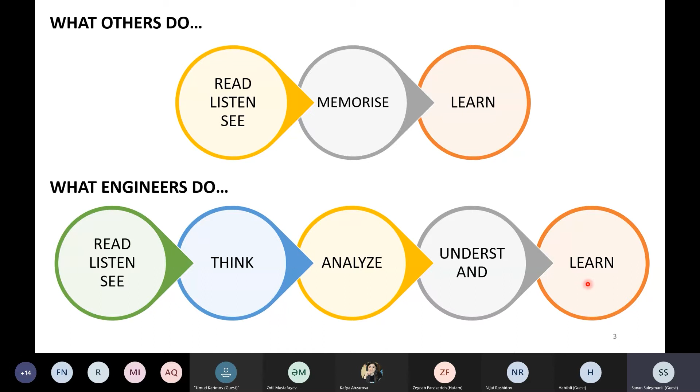I will show you also a pyramid that shows how we learn, and at the end you can see that 95% of what we teach to others - if you share your knowledge, you learn more and more.

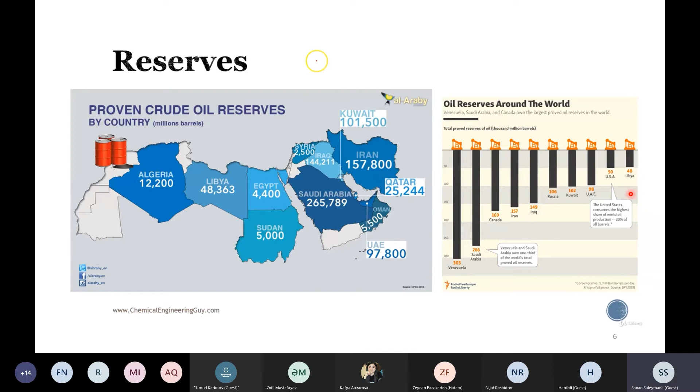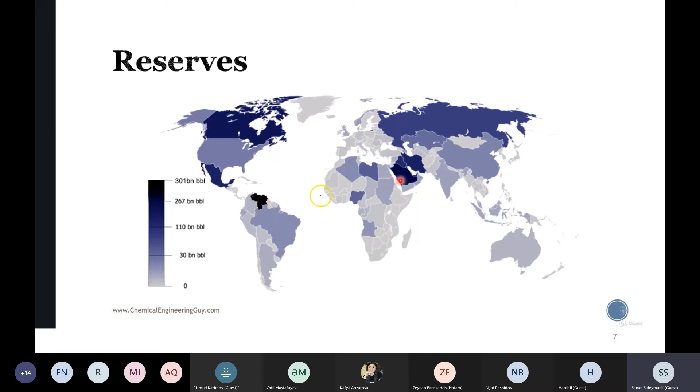Oil reserves - why do we have oil refineries? Because we have a lot of oil reserves. Here you can see that the most oil reserves can be found in Venezuela, Saudi Arabia, then Canada, etc. If we have so many oil reserves, then we also should have many oil refineries. This shows the map view of the oil reserves - again you can see the most oil reserves are in Venezuela, Saudi Arabia, Iran, Canada, etc.

This is the statistics from the BP Statistical Review of World Energy 2018. Comparing the years 1997, 2007, and 2017, we can see a sharp increase in proved reserves, from 1,162,000 million barrels in 1997 to nearly 1,700,000 million barrels in 2017. If you are interested, you can check the market analysis and supply chain reports - there are a lot of reports on the internet. However, I don't want to go deep into this part because we have a lot to discuss in terms of engineering.

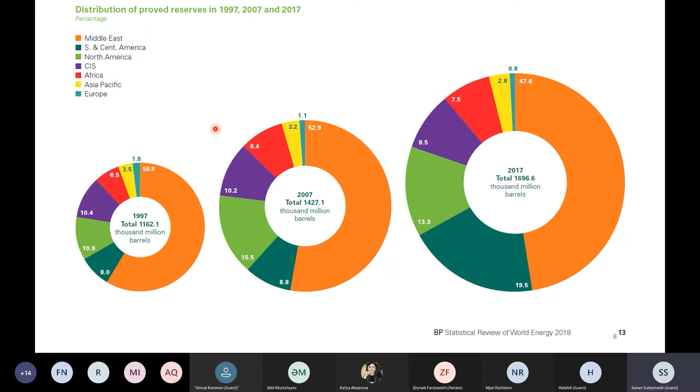Then what's crude oil? Crude oil is a multi-component mixture consisting of more than 108 compounds. In the next slide we will see that crude oil is mainly composed of hydrocarbons and also other impurities like water. That's why we have to refine oil - because we cannot use crude oil effectively without refining.

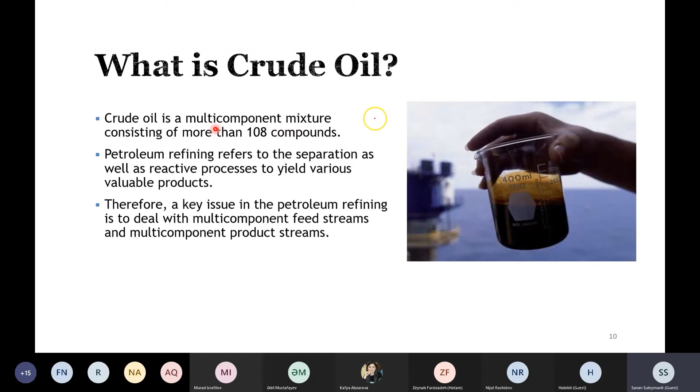You can ask, what is refining? Refining is just changing the shape, or bringing the feedstock to useful products. It's not only oil that is refined - milk is also refined, and we produce different products from it. Nuts are also refined. So different feedstocks can be refined, but today we will talk about crude oil refining. Petroleum refining refers to the separation as well as the reactive processes used to yield various valuable products.

Before starting the refining, we can classify our oil. Here you can see we have light sweet to heavy sour oil. What is light? Light means light oil, low density oil, with API from 35 to 60. You can find the specific gravity using this formula, which means that once API increases, specific gravity decreases. So higher API means lower density of crude oil - that's why it is considered light oil.

For your information, the API of the crude oil we are refining right now at Heydar Aliyev Oil Refinery is around 30. 30 API means we have medium density, and that corresponds to around 0.875 specific gravity. What about sweet and sour?

Sweet and sour represent the sulfur content of crude oil. From 0 to 0.5 weight% sulfur, it is sweet. If you have more than 0.5 weight% sulfur in the crude oil, that is sour. Okay, what does this tell us? Why do we need to classify our oil as light and sweet?

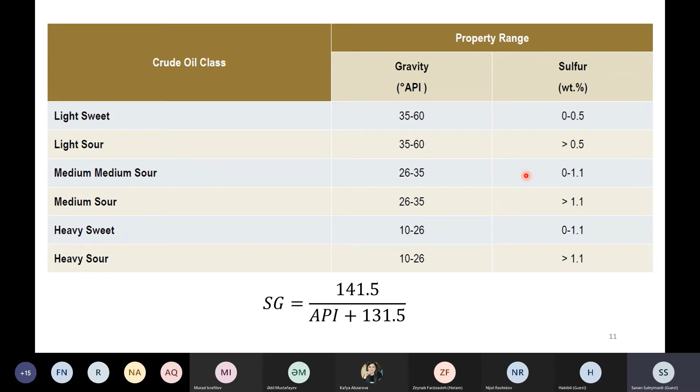Before answering the question, we can check the composition of crude oil. From 1 barrel, which is around 159 liters of crude oil, we can produce around 46% gasoline, 9% jet fuel - also called kerosene - and 26% diesel and other fuel. Of course, these numbers are not exact. They can differ for different types of crude oil, and depending on what we want to produce more of.

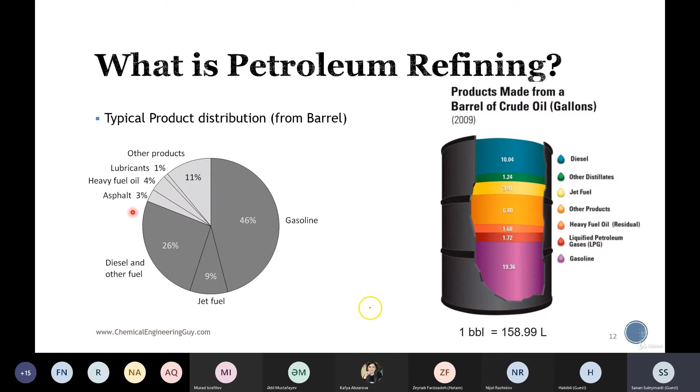If you want to produce less gasoline, then we design our process so that this number will be lower, but diesel will be higher, for instance. In fact, you can see that light fuels, or the useful fuels, make up around 80% of crude oil - that is where refiners earn the most money. That's why refiners try to produce as much gasoline, jet fuel, and diesel as possible in order to make money. Other products - lubricants, heavy fuel oil, asphalt, bitumen - are considered heavy products, which in fact have low contribution to profit.

There are around 108 components in the crude oil, and the carbon number can start from C1 to C70 plus. That's why it's a mixture of really light components till heavy components. We have to separate it.

We separate it, but our products are not pure substances either. Our products are also mixtures, but in a certain range. So we have C1 and C2, which we call dry gas. We have C3 and C4, which we call LPG. So from C1 to C4, we have the gases.

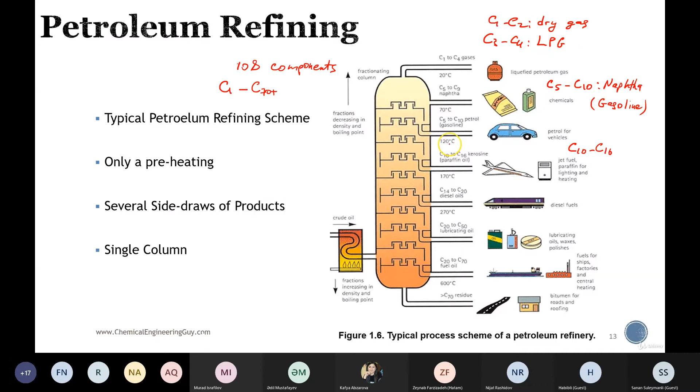Okay, I continue again with the same BFD. Now it should be more similar to you. Now you are already familiarized with some of the terms. For instance, what we said is that we have LPGs, butanes. Butane is C4, LPGs is C3 and C4.

We have the refinery fuel, C1 and C2, jet fuel, kerosene, diesel oil, fuel oil, which also can be considered as diesel. And then asphalt and coke. We have the different streams of gasoline from different units, and then we blend them in the pool.

So each block we call a unit. Each unit does not mean one piece of equipment. Depending on the size and the complexity of the unit, there can be from 50 to 500 pieces of equipment. So when we say the unit, it is a small plant in the refinery.

Now I would like to ask you something. We said that if you want to learn, we have to think, analyze, and understand. For this, we have to ask questions. Now I want you to write down a why question or how question. Just look at the scheme, the block flow diagram, and write whatever you want to ask, starting with why or how, in the chat please.

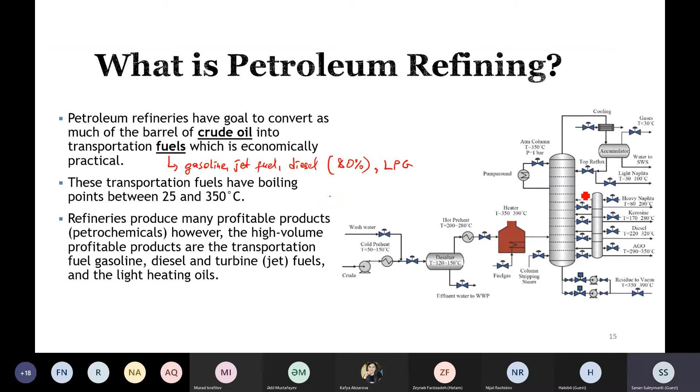This is the crude distillation unit, which we will talk about later. And if you remember, I asked the question why we should classify the crude types. We have sweet and sour, light and heavy. This is what we learned about the crude types.

If you have a sweet and light crude, then we need a less complex refinery to refine this crude. However, if you have heavier and sour crude, it means that we need more complex equipment. Why? Because if it is sour, you have to clean that. To clean more sulfur, we need higher design capacities or more complex equipment, higher pressure, higher temperature, etc.

If we have the lighter crude, it means that we have more transportation fuels in the crude oil. But if you have heavier, then it means we have less. What we want to do is crack the heavier part of this crude into lighter hydrocarbons, which are considered transportation fuels. And cracking units are more complex.

And this, what I explained, is written here.

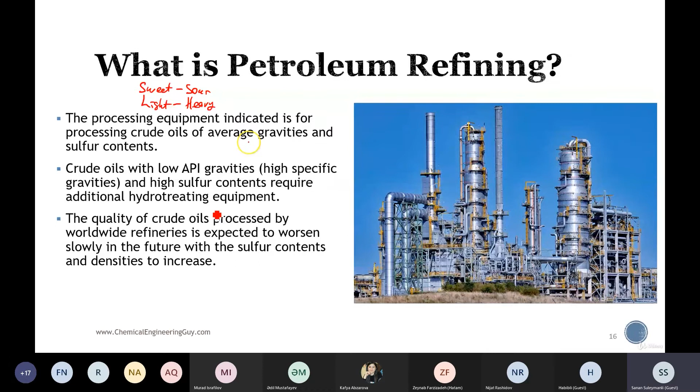However, in the future, what we can expect is that we will run out of light crude as time passes, and we will have to use heavier crude in 20, 30, or 40 years. In this case, this will make the refiners process the entire barrel of crude rather than just the material boiling below a certain point. So you will use higher temperatures, higher pressures, and it will cost more to refine the heavy crude.

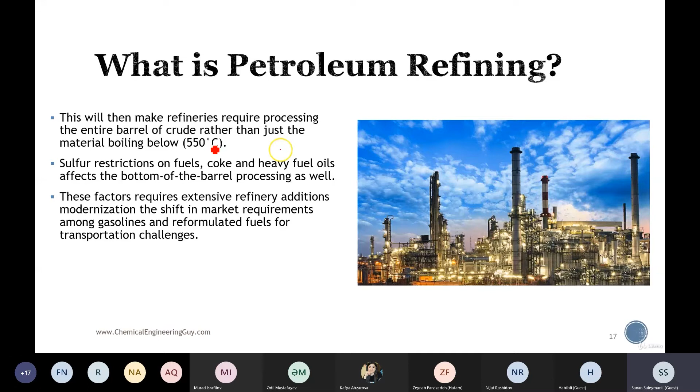These are examples of the petroleum products, which we saw in the previous one. We have the gases, naphtha, kerosene, light gas oil, heavy gas oil, diesel, and residue.

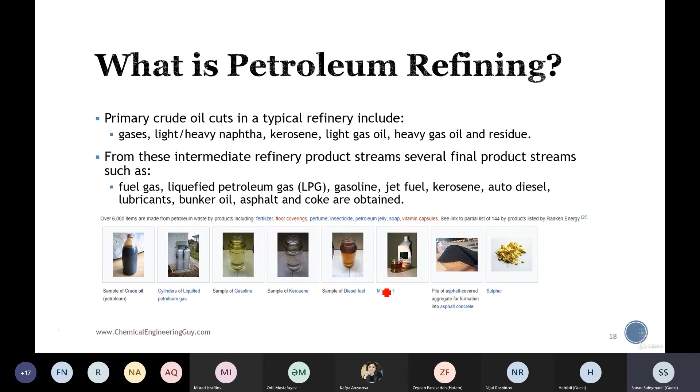You can find photos of the different products. Gasoline is transparent. Kerosene is also transparent. The diesel fuel has a yellowish color, and as it becomes heavier, the color also becomes darker.

These are different types of products obtained from crude, because the light fuels such as C3, C4, and light naphtha can be sent to a petrochemical complex. Here in Azerbaijan, we send light naphtha to Azerkimya. In Azerkimya, they produce ethylene, and then they send ethylene to Socar Polymer. Socar Polymer produces polypropylene, and from polypropylene we can have, let's say, bottles or other products.

From chemicals, which are also produced from crude oil, we can have nylon, styrene, polyester. We have liquid fuels, lubes, residuals. Residuals can be used for bunker C, asphalt, roofing material. So as you can see, there is no loss in crude. We use the lightest component from C1 to C2 as fuel gas, to the heaviest component as asphalt or roofing material.

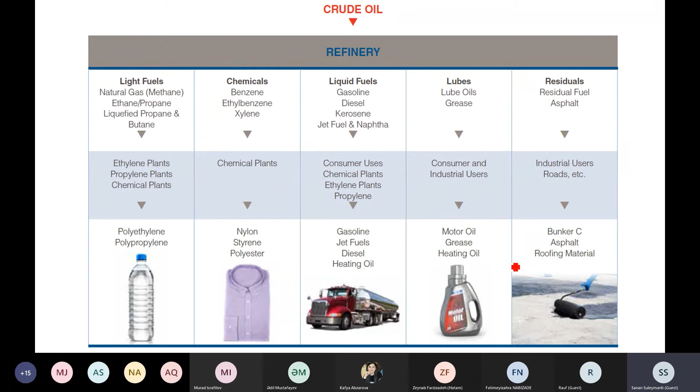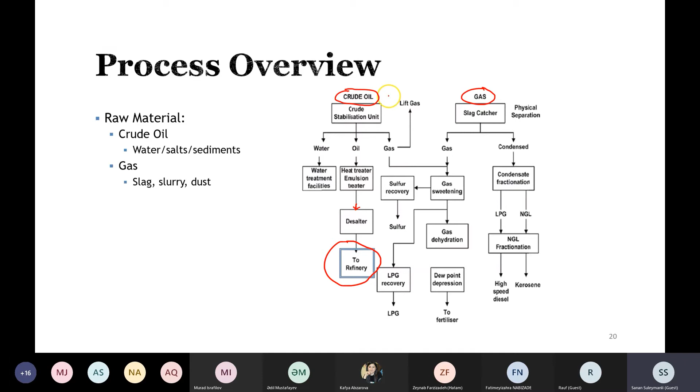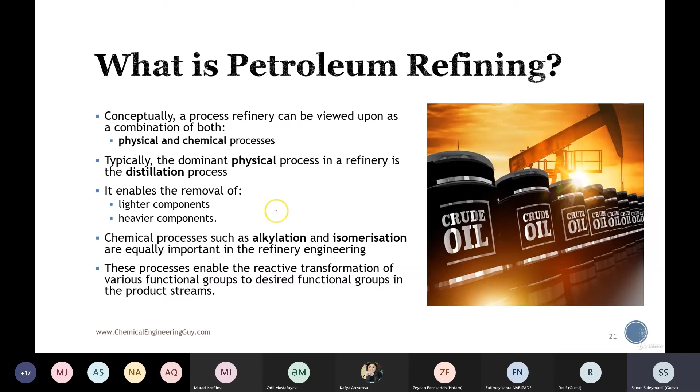And what is petroleum refining? In the refinery, there are both physical processes and chemical processes. The physical processes can be distillation, atmospheric distillation, vacuum distillation as a process unit. But of course, we have different types of separation or adsorption in each unit as a single unit operation. We have alkylation, isomerization, cracking, reforming. These can be examples of chemical processes.

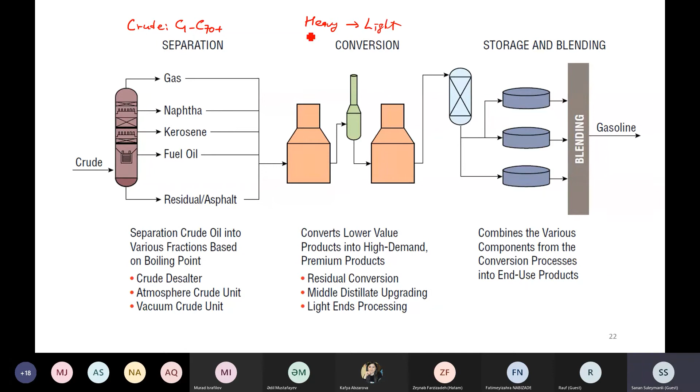We can separate the refinery processes into three parts. The first part is separation. Why separation? Because crude is a mixture of C1 to C70 plus, and we have to separate it first. Once we separate, we want to convert heavy products to light products. Why do we convert heavy product to light product? Because light products are transportation fuels, which helps to make higher profit.

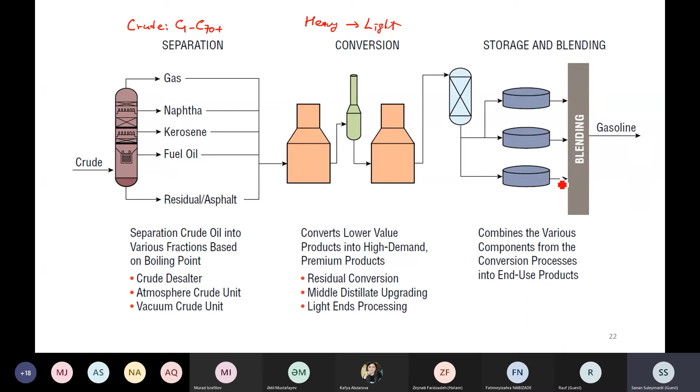And then after all, we have storage and blending. We blend the different streams, as I showed in the block flow diagram for gasoline, and also we have some additives to diesel, jet fuel, etc. Is that all? No. Why? Because we also have treating. What is treating? You can think of treating as cleaning - cleaning from sulfur content, cleaning from nitrogen content, also some oxygen, etc. Why? Because we have some standards, we have some product specs for the transportation fuels and also other products.

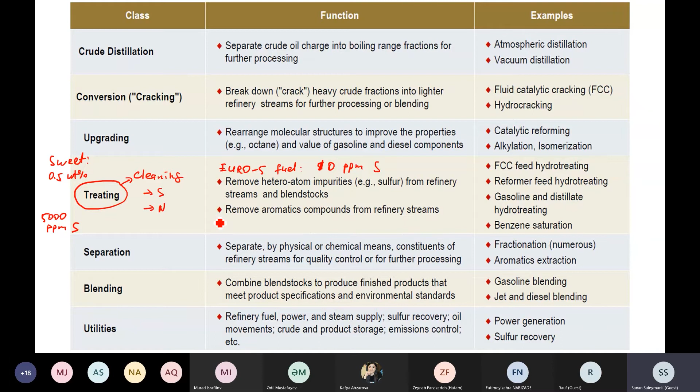For instance, if you want to produce Euro 5 fuel, you have the 10 ppm sulfur limitation. So what was the sulfur content of crude oil? We said for sweet crude, it is 0.5 weight percent, which means 5,000 ppm S content in the crude oil. But our final product, whether diesel or gasoline, should have the 10 ppm sulfur content. That's why we need the treating processes. These treating processes will remove the heteroatom impurities from refinery streams and blend stocks, and remove aromatic compounds from refinery streams. We will talk about treating more later.

It means we have from gases to really heavy residue. We need a special process, higher temperature and pressure. Also, the residues can poison the catalyst, because the hydrotreating process is a catalytic process. It can poison the catalyst in the short term, and it also has the 5,000 ppm sulfur. All this makes having a single hydrotreater before the distillation unit impractical. That's why what we do is first separate, then have different processes for each type of product, followed by a hydrotreater. But whatever you have there, you cannot sell your product without hydrotreating. You cannot sell your product with such a high sulfur content.

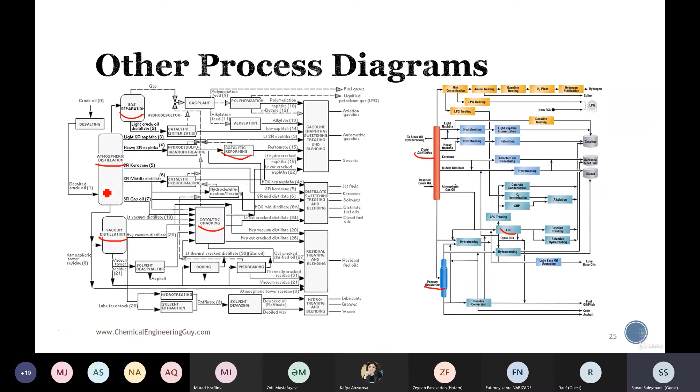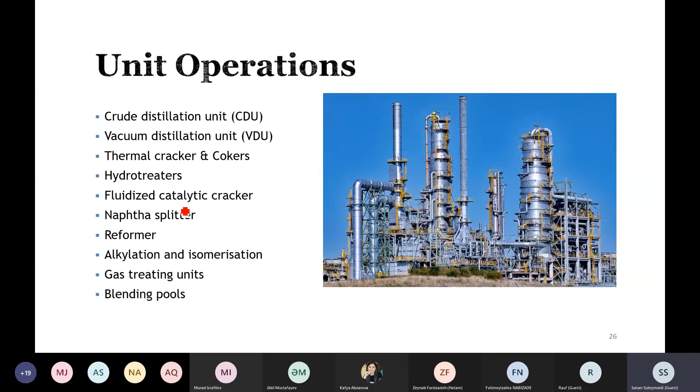Once again, what is a unit? Each single block is called a unit in the refinery, or unit operation. So here, what you see in these block flow diagrams are these types of unit operations: crude distillation unit, vacuum distillation unit, thermal crackers. Now delayed coker units are mostly used, hydrotreaters, catalytic cracking, naphtha splitter, etc. Now we are going to talk about these unit operations briefly.

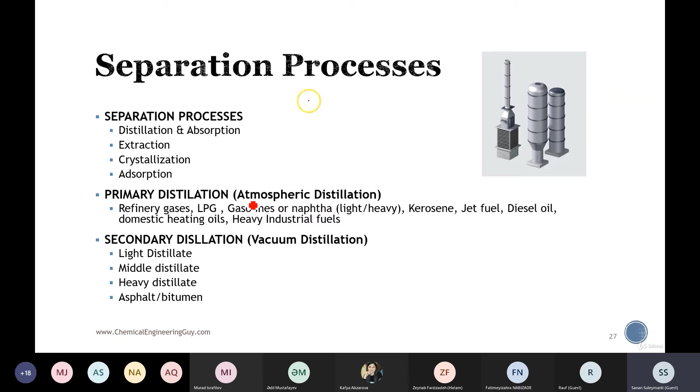Separation processes. So what I said before is that we can classify the processes in the refinery in a few steps. The first part is the separation processes, which can be distillation, absorption, extraction, crystallization, adsorption. You can find these separation processes in each unit; each unit has a separate distillation column, a reboiler, etc. This primary distillation uses atmospheric distillation, because that's the first unit of the refinery. We also have a secondary distillation, vacuum distillation. And conversion processes are catalytic reforming, isomerization, alkylation, hydrocracking, catalytic cracking, etc.

Sanan Bey, we have a question in the chat box. Rasul Amirov asks, what is a reformer? Thank you, Rasul, for your question. I will talk about the catalytic reforming process in future slides.

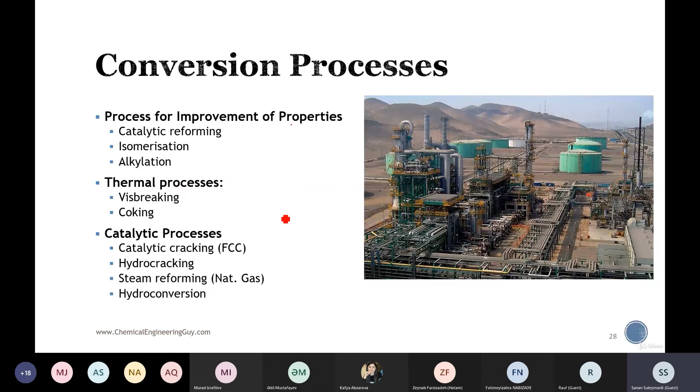And finishing processes: sweetening. Sweetening is used for gases, because if gas has H2S content, we have to remove the H2S content before we use the gas as a fuel. Why? Because if you burn H2S, it converts to SO2, which goes to the atmosphere, and when we have rain, we get acidic rain. That's why we have to sweeten the gases before we burn them.

And also hydrotreatment. We have hydrotreatment with hydrogen, for instance the RSSR plus H2 hydrogenation reaction, giving the product plus H2S. This H2S leaves the hydrotreatment unit process as a gas, in the dry gas, and then it is sweetened.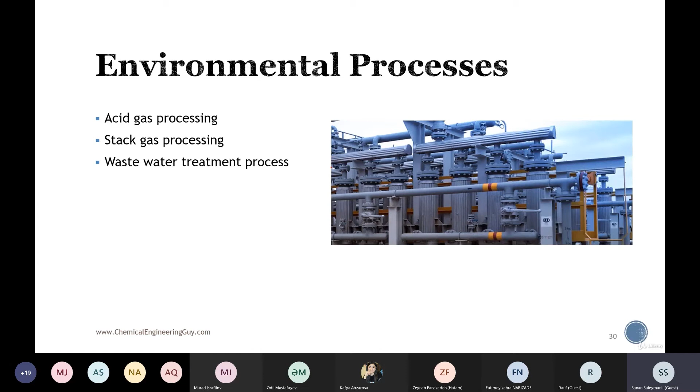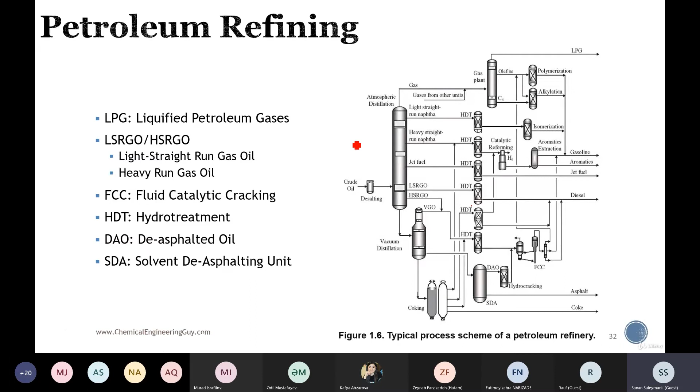Now, everything starts from atmospheric distillation. This is also a different view of the block flow diagram. Each unit has so many pieces of equipment, for instance the catalytic reforming unit. This is a really simplified PFD, but the real PFD has so many pieces of equipment, or the isomerization unit, alkylation unit. Each block is a different unit, each block has different processes.

Crude distillation unit. The crude coming to the refinery first goes into the desalters. In the desalters, we first add the wash water, we add the demulsifier, and then we create an emulsion, and then we separate all the water in the crude from the crude oil. The effluent water goes to the wastewater treatment plant, and the crude oil which was separated from the water is first preheated and sent to the heater, and at around 390 degrees it enters the atmospheric distillation column.

In the atmospheric distillation column we separate the products which we saw in the block flow diagram: gases, light naphtha, heavy naphtha, kerosene, diesel, atmospheric gas oil. This can also be considered as diesel, you can think of it like light diesel, heavy diesel. And then we have the atmospheric residue going to the vacuum distillation unit.

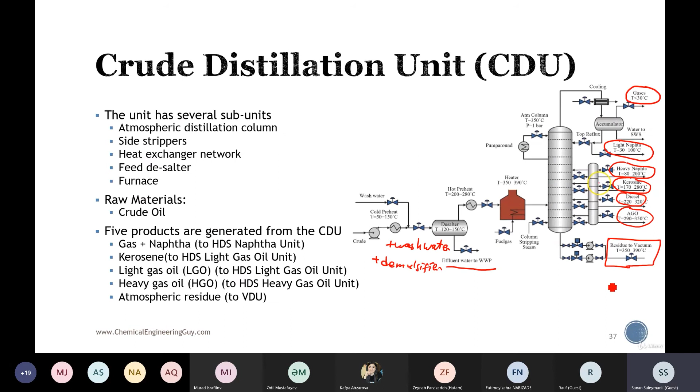Operating conditions: the temperature at the entrance of the furnace, where the crude enters, is around 200 to 280 degrees. And after the furnace, it is heated to 330 or 370 degrees. The pressure is around 1 bar G, as can be seen from its name, atmospheric distillation unit.

This is the flow diagram, a simplified process flow diagram of the crude distillation unit. It's the same atmospheric distillation or crude distillation unit. We have the same products again here, and this residue goes to the VDU, vacuum distillation unit.

What happens to these products? They are sent to the hydrotreater. And sour water - what does it mean, sour water? We have too high H2S content in the water. It can be sent to the sour water stripper, and in the sour water stripper, H2S and water are separated. Water is sent to the wastewater treatment plant, where we treat the water, and the water is sent to the Caspian Sea. And H2S is sent to the sulfur production unit, so we produce sulfur from H2S.

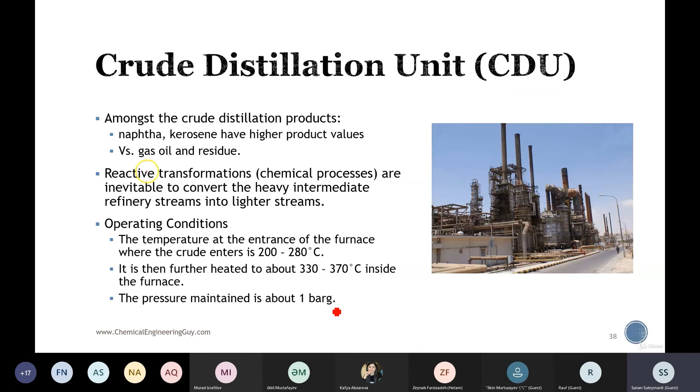Okay, I will answer. So you are probably familiar with absolute pressure and gauge pressure. P absolute is P gauge plus P atmospheric. So if you have G here, it means that it is 1 bar G, gauge pressure, which is equal to 2 atmospheric or 2 bar absolute pressure. But they are the same, so this has the same number.

This is the reason. And here I can see that Ilkin asked whether this water means that we have water in the feed. Yes, we have water in the feed. Yes, we have desalters, we try to separate the water as much as possible, but we still have water left in the feed. Also from the hydrogenation processes, if there is oxygen as an element, it can react with H2 and we produce more H2O.

There was another question: how many bars are in 1 bar G? 1 bar G is 1 bar, so 1 bar G is 1 bar plus 1 atm. This gives you 2 bar absolute. And 1 atm can be taken as 1 bar. If you want to be exact, 1 atm is slightly different, because 1 bar is 10 to the power 5 Pascal, and 1 atm is a slightly different value in Pascal.

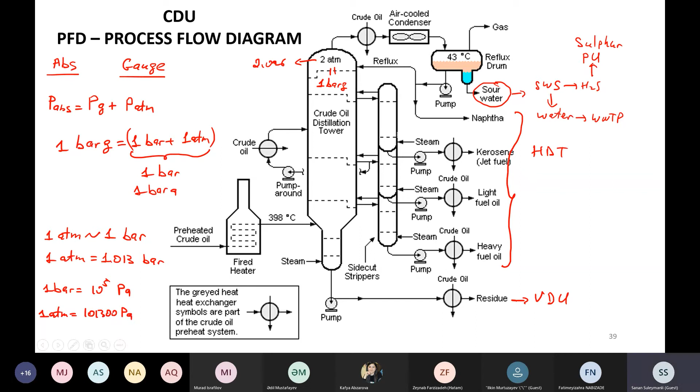What does it mean? 1 bar G is 760 millimeter Hg. So if you want to convert, let's say 40 mmHg, you will get around 0.05 bar G. Now I want to ask you, why do we have a vacuum distillation unit?

Why do we have the vacuum condition to separate the light products from the heavier ones? Hi, I can answer this question. Yes, please. Because if we separate in the previous unit, in this case we would need a higher temperature, approximately over 500.

But in the vacuum distillation, we have ejectors here, and we create the vacuum phase. In this case, we decrease the temperature and can separate at approximately 400 instead. But if we separate at higher temperature, our carbon-carbon bonds or others can be broken.

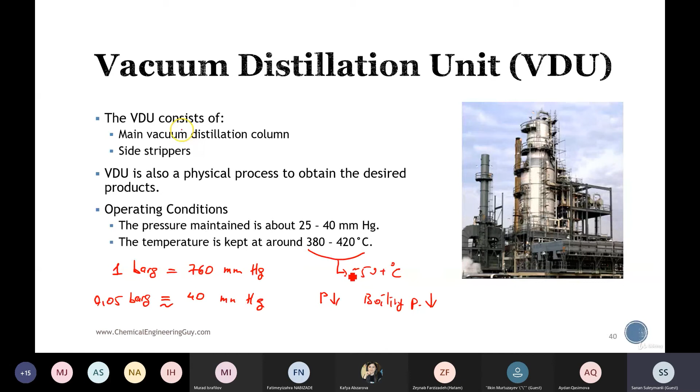So we have different products from the VDU, which are light vacuum gas oil (LVGO), heavy vacuum gas oil, and vacuum residue. Vacuum residue is the heaviest part of the crude oil, which is sent to the thermal cracking or coking unit, or it can be sent to the bitumen unit to produce bitumen.

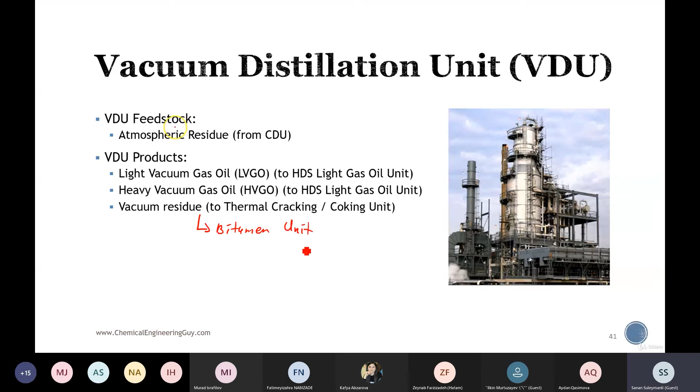We also sometimes have a lighter end, diesel, which is in low amount.

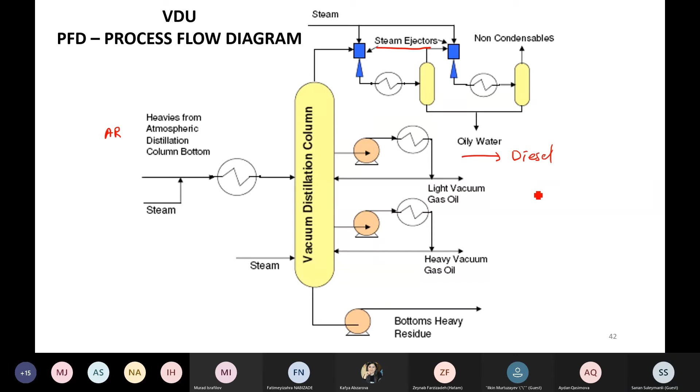Okay, we talked about the atmospheric distillation unit. We said the atmospheric residue goes to the vacuum distillation unit. We have the vacuum residue. Vacuum residue goes to delayed coking. Vacuum residue goes to the bitumen unit. Here we produce asphalt, and we will produce coke. I will talk about that later.

We have the light vacuum gas oil. We have the heavy vacuum gas oil, and then atmospheric gas oil, which is sent to the hydrotreater, and then to the FCC.

And the rest, as you can see, diesel oil is sent to the diesel hydrotreater, and then it is sent to product storage, and after adding some additives, it is sold. Also for jet fuel, we don't use a hydrotreater here, but instead use caustic and amine to clean the sulfur content of the jet fuel, which is why it's called the Merox treater. After the jet fuel is cleaned, it is also sent for sales.

We will talk about light naphtha and heavy naphtha now. First of all, gas treating units. As you can see, we have gases. When we say gas, we talk about C1 to C4. These and other gases all come to the gas processing unit.

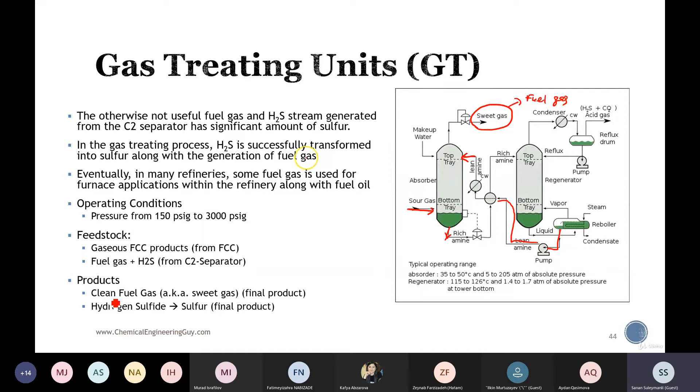Feedstock is the gas products from cracking, fuel gas with H2S, and the products are clean fuel gas and hydrogen sulfide. So what happens to hydrogen sulfide? Going back, hydrogen sulfide from the sour water stripper goes to the sulfur plant. With the Claus technology, we can produce sulfur, which can be solid or liquid. What happens to the sulfur then? It can be processed in a different plant to produce sulfuric acid, for instance, but in our refinery we will just sell it to consumers.

So now we are done with gas. We are done with diesel, atmospheric gas oil, atmospheric residue, and jet fuel. We have left light naphtha and heavy naphtha.

Hydrotreaters — as I told you before, the sulfur content in the crude is significantly high. What is it? 0.5% for sweet, and if it is bigger than 0.5%, that is sour.

Products from the CDU and VDU consist of a significant amount of sulfur, and sulfur removal is accomplished using hydrogen to remove the sulfur as H2S. So hydrotreating, or hydrodesulfurization (HDS), is used, but it is not only HDS — it is also HDN, hydrodenitrogenation, because not only sulfur content but also nitrogen content is removed. So HDS removes sulfur as H2S, and HDN removes nitrogen as NH3, through reaction with hydrogen.

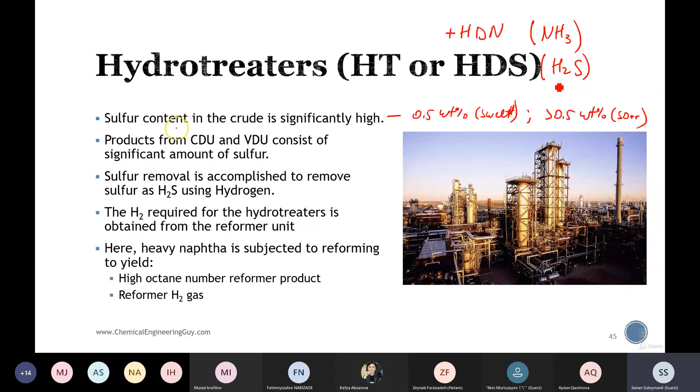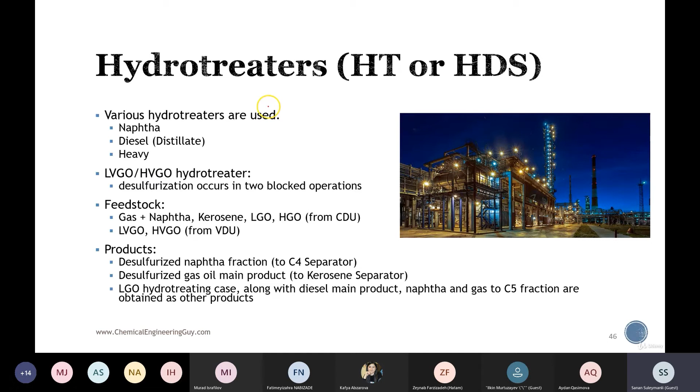So various hydrotreaters are used — we already talked about this one. You can use hydrotreaters for feedstock or for products of different units. For the kerosene hydrotreater, as I said, now mostly the caustic Merox unit is used to treat kerosene, which means we don't use hydrogen. Instead, we use a caustic and amine solution to treat the kerosene.

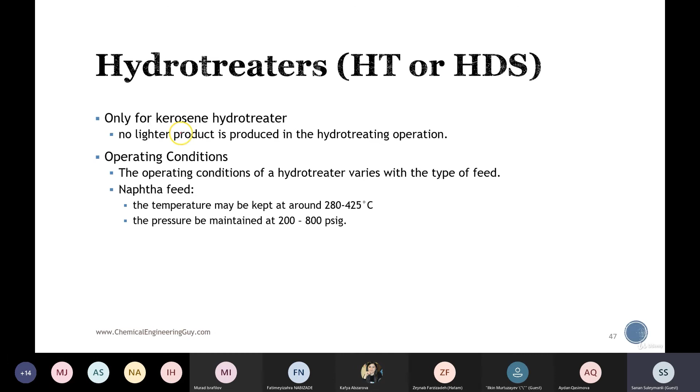As you know, hydrogenation reactions — hydrocarbon plus H2 — are combination reactions, which means they are exothermic. That means we have to control the temperature really carefully in our reactors, and H2 is always given in excess, for instance 3 or 4 times the needed amount.

Later on, in the gas separator, H2 is separated and sent back to the recycled gas compressor. The used hydrogen is made up with fresh hydrogen, which comes from the hydrogen production unit or the reformer. We will talk about reforming later, but just remember the hydrogen comes from the reformer unit, or HPU, hydrogen production unit.

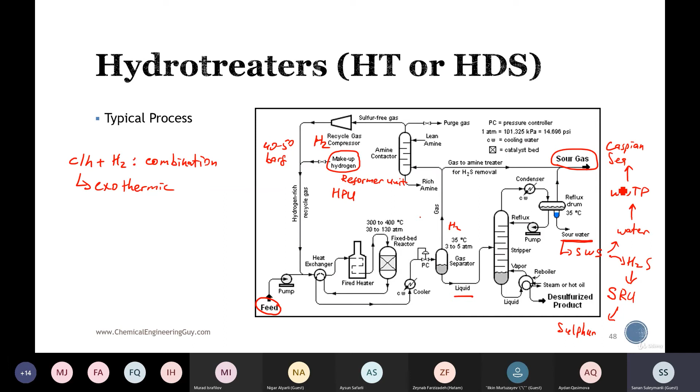So we are left with naphtha, light naphtha and heavy naphtha. Naphtha you can also think of as gasoline. Naphtha splitter - why do we have a naphtha splitter? Because we have light naphtha and heavy naphtha here, but in some cases we have just one naphtha stream.

If we have one naphtha stream, it should be sent to the naphtha splitter. Here we separate the heavy naphtha from the light naphtha. Once we separate it, we can send the light naphtha to the isomerization unit, and we send heavy naphtha to reforming.

You can also think of it like CCR, continuous catalytic reforming. Why do we do all of this? Because only producing naphtha or gasoline is not enough for us. We want to have the RON octane number as high as possible. But we have around the 80s for light naphtha and heavy naphtha from the atmospheric distillation unit. That's why we use a naphtha splitter to split light naphtha from heavy naphtha.

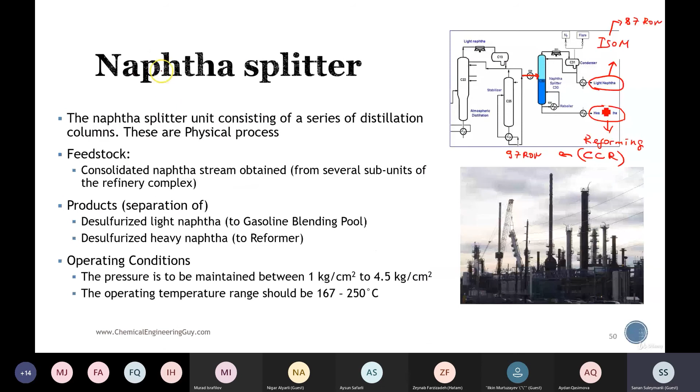And reformer - as I said, heavy naphtha is sent to reforming. What is reforming? From its name, we change the shape or chain of the hydrocarbons. From the normal chain, we produce aromatics. Aromatics are produced because aromatics have a higher octane number.

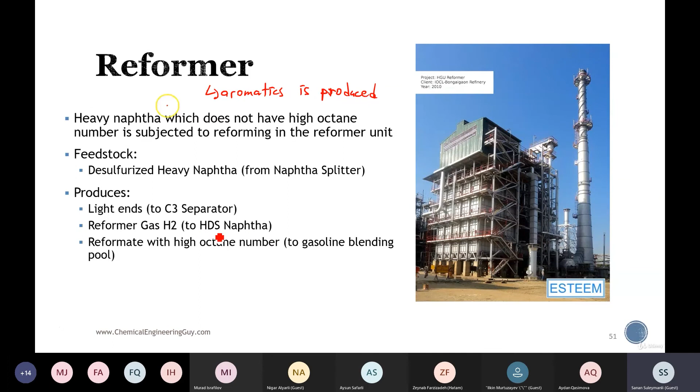So the feedstock is desulfurized heavy naphtha. The products are light ends, reformer gas, and H2. What we do with reformer gas is send it to the hydro desulfurization or hydrotreating units, reformate with a higher octane number.

Question in the chat box: what are the criteria for this choice? I think that is about this one - you choose by evaluating your catalyst.

For instance, if you have a catalyst for the reforming process which is heavily poisoned by sulfur, you should have the hydrotreating before the reforming. Or you can also have the HDT here, then the CCR, then the isome, because the catalysts in isomerization and catalytic reforming units are poisoned by sulfur content.

But as I said, you make a feasibility study, compare both options in terms of energy and other factors, and decide which one is better for you. For instance, in our refinery, it is this one: first we have the hydrotreating unit, then the naphtha splitter, then light naphtha and heavy naphtha are sent to the isomerization unit or catalytic reforming unit. For a different refinery, it can be a different case. Hope I could answer your question.

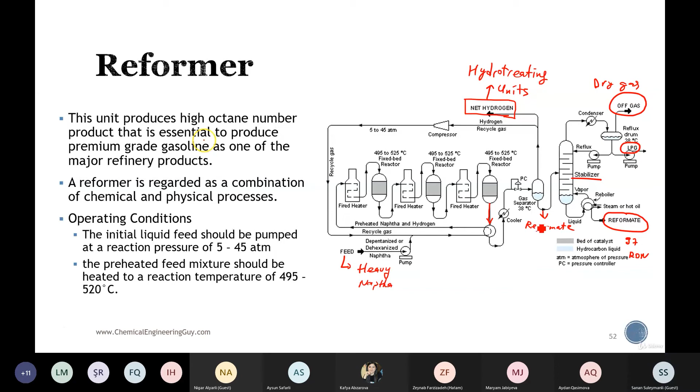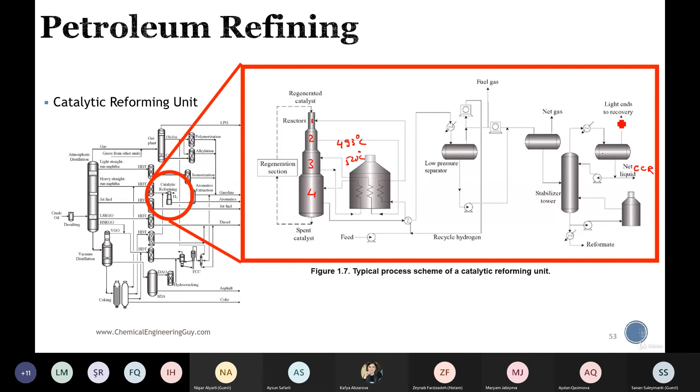Finally, we have the fluidized catalytic cracking. We'll go back here. So we have atmospheric gas oil, light vacuum gas oil, and heavy vacuum gas oil. We separated them, but these are heavy products. What we want to do is send it to the fluid catalytic cracking unit to crack heavy products in order to have light products.

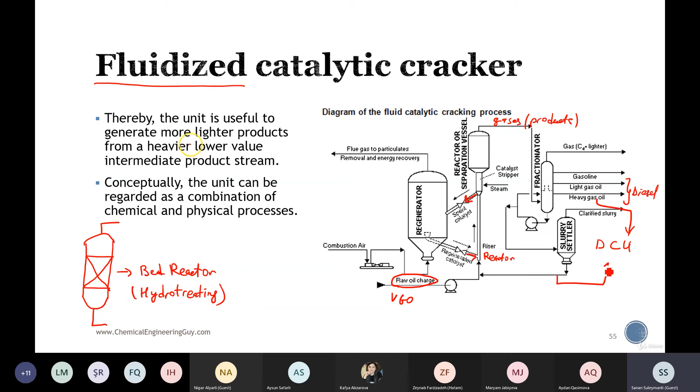Yes, we have slurry, so slurry settler. We can use the slurry to send it back to the reactor because it has high temperature, or we can also use slurry to send it back to the DCU, delayed coker unit, as I showed here. So slurry we can use - we send it to the delayed coker unit and produce coke there.

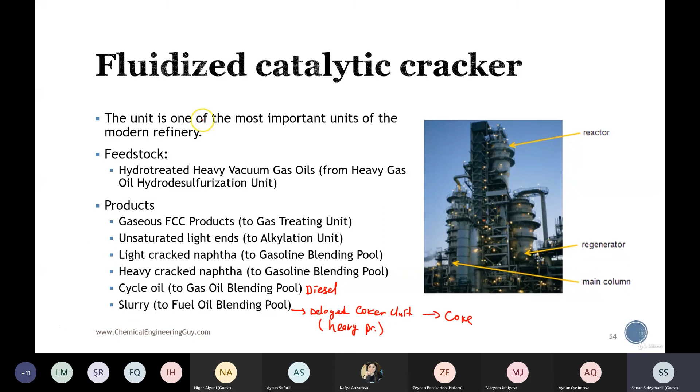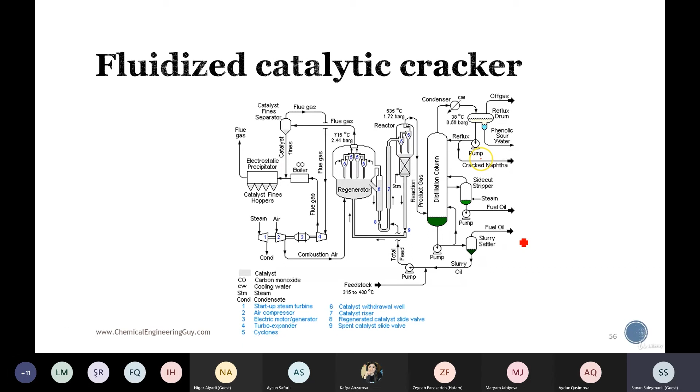This is another scheme of the fluidized catalytic cracking. As you can see, we have the regeneration, reaction, distillation column, and all the different types of products.

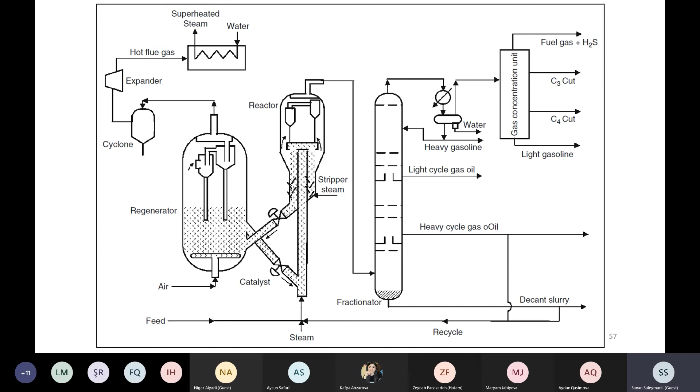Another scheme, I just added different schemes to my presentation so that when I send it to you, you can check and compare the different schemes and find the similarities and differences between them.

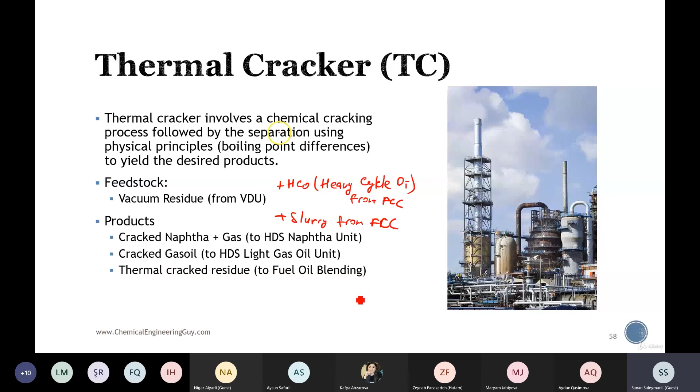But in modern refineries, we use the delayed coker unit to produce coke. Again, we have the naphtha as a result of the cracking. We have diesel, which are then sent to the HT hydrotreating process. But we have also coke, which is used in furnaces, such as the metallurgy furnaces. This coke is not a loss, but it is cheap. It does not add much value on the refinery profit. However, the delayed coker unit is really important for the refinery.

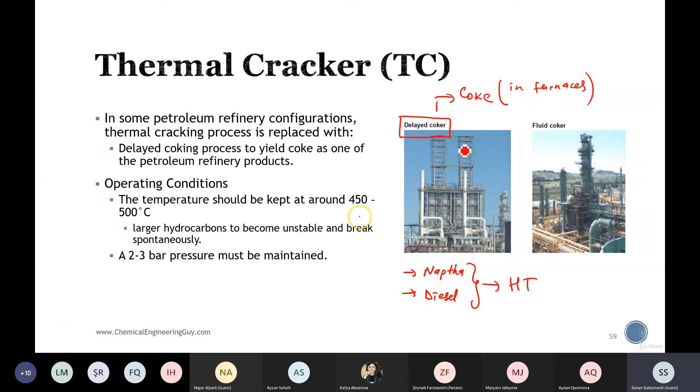Why? Because, let me explain. Delayed coker unit means that I send my vacuum residue to my delayed coker unit. If I have a problem with the delayed coker unit, it means that I do not have much space for vacuum residue. Once the storages are full, I cannot do anything with my vacuum residue. That's why I have to stop the plant. So it is important - there is no loss here, and everything goes for sales.

Then for naphtha or the gasoline blending pool, we have the isomerate, let's say octane number of 87. We have the reformate, octane number of 97. We have the hydrocracked gasoline, octane number of 92. We have the alkylate and FCC gasoline, around 90, if I'm not mistaken. And then it goes to the gasoline blending pool to produce, let's say, the 92 gasoline and 95 gasoline.

We do not have it here, but we can also have the MTBE unit. The MTBE unit produces MTBE, methyl tert-butyl ether, which has an octane number of 116.

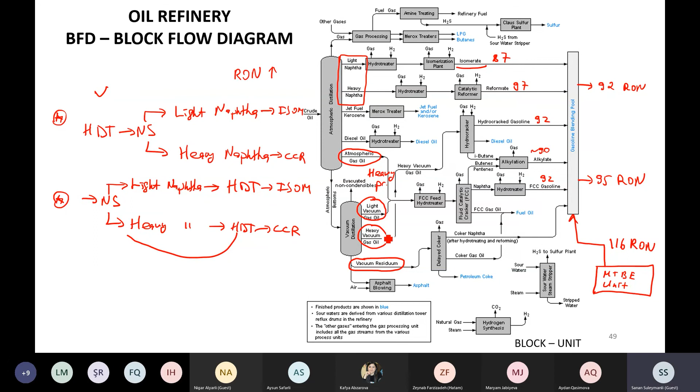Thermal crackers, and then finally we have the blending pools. In blending pools, we can blend the different streams of gasoline in order to have the 92 or 95 gasoline with the required spec, or we can have some additives. For instance, we have additives to diesel fuel, additives to jet fuel, to meet the product specification. Which product specifications should we consider? These are the ASTM temperatures, viscosities, octane numbers, flash point, pour point.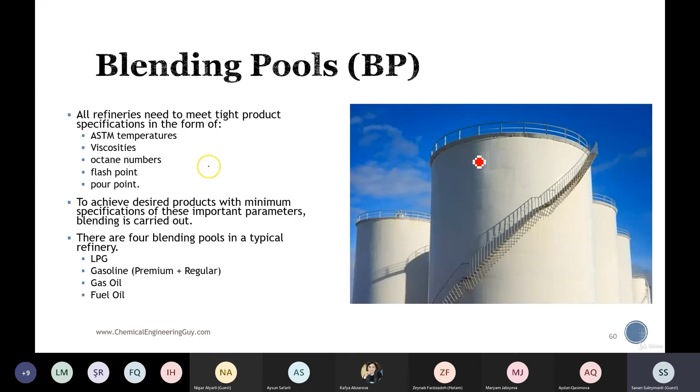Spherical storage can withstand high pressure. Because C3 and C4 are gas at normal conditions. But when it comes to LPG, it means liquefied petroleum gases. Now, to liquefy it, we need high pressure, and spherical storage can withstand high pressure. The cylindrical storage can have around 5-6 bar G, up to 10 let's say, but this spherical one can have 30-40 bar G, even higher if required.

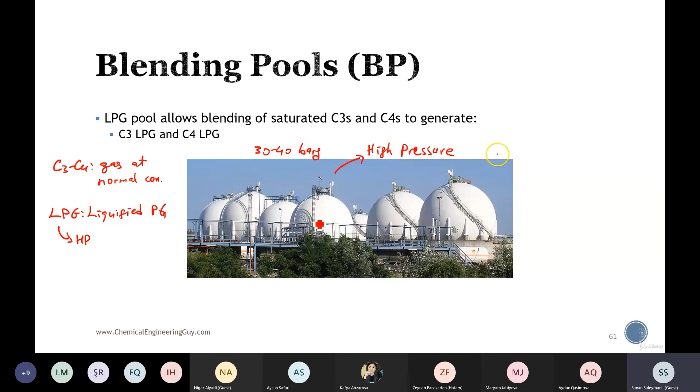Again, about the blending pools, the most important blending pool in the refinery complex is the gasoline pool. Why? Because we want to have the specific, defined octane number for the gasoline we want to sell. The premium and regular gasoline products are prepared by blending appropriate amounts of n-butane, and different streams: reformate, light naphtha, alkylate, light cracked naphtha. Or we can also add MTBE here.

And you can see that it is the R plus M divided by 2 method. What does it mean? If you want an octane number, it can be RON, research octane number, or MON, motor octane number. There is a difference, delta, of around 10. For instance, if you have 97 for RON, for MON you have 87, and it says that this value is the average of these two. So if it only writes the research octane number, it would be probably around 92, 94 or 95, and 98.

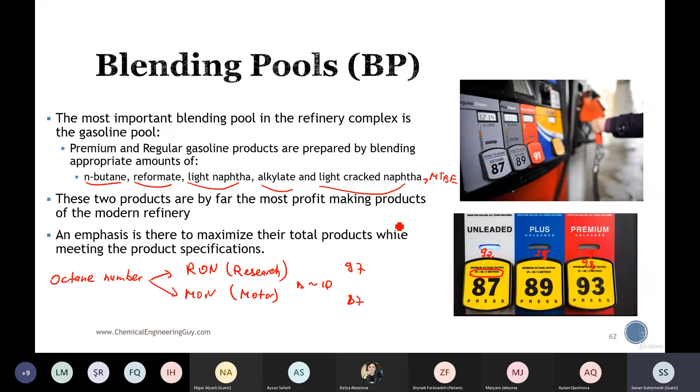So this is, let's say, the supply chain of the crude oil and the products of the refinery. The crude oil comes to the gathering lines, crude storage tanks, and then from here it is sent to the pump station. We have transmission lines, and finally it is sent to the oil refinery. From the oil refinery we have diesel storage, gasoline, and then they are sent to the marketing terminal, tanker trucks, and for service.

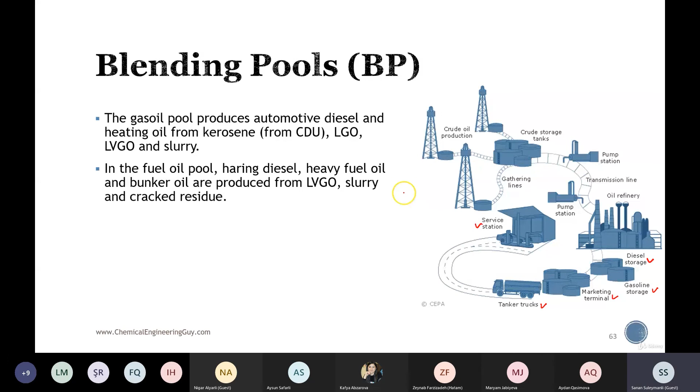This is the end of my presentation for today. We talked about the refinery processes in general, and also tried to summarize the processes of the main units at the refinery, such as the atmospheric distillation unit, the vacuum distillation unit, fluid catalytic cracking unit, and continuous catalytic reforming unit. We also talked briefly about the delayed coking unit, and of course the hydrotreating processes throughout the whole refinery. So if you have any questions, please do not hesitate to ask me.

Thank you very much, Sanan Bey. That was a great presentation. There was a lot of information, actually. Yes, I know.

I actually have a question. In one of the slides, you said LPG is kept in spherical tanks, right? Yes. But I wonder how the shape of the tank affects the pressure.

One moment. So it comes from, let's say, the spherical nature of the tank. When it is spherical, you can imagine that the material is bonded to each other in a systematic way, and that's why it can withstand high pressure. But when it is cylindrical, there are two parts: the shell part and the top and bottom part. This makes the storage less resistant to high pressure. So it comes from its geometry, and in each geometry, how the material is bonded to each other.

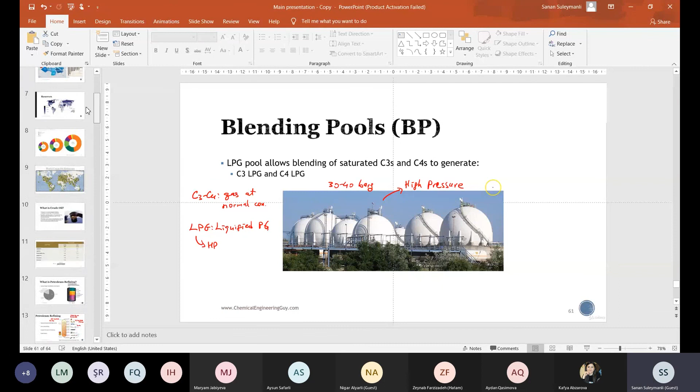We will have the next session next week. I will tell you the exact time, but what I told you is that if you want to remember what we learned, we should reproduce it. That's why I want to give you a kind of homework assignment. Just check this block flow diagram again and again after the session, whenever you have time, and try to really understand the processes there. Do you really understand why we have hydrotreating here? Do you really understand why we have the fluid catalytic cracking here, based on what we discussed today? And then just take a separate piece of paper and try to draw the block flow diagram with your own understanding.

Do not memorize and copy it. Just think: from the atmospheric distillation unit, which products do we have, then what do I need to proceed further, where should I put the fluid catalytic cracking, this kind of stuff. Think and try to construct this block flow diagram yourself. Once you can construct it yourself, you will understand the processes at the refinery better.

In the next sessions, we will go deeper into each process. We will talk through the process flow diagram. Today we mostly used block flow diagrams, but in the next sessions we will talk through the process flow diagrams of each unit. So if you want to learn more, if you want to understand more, first you have to understand the block flow diagram well. This is the homework assignment for the students who want to study more.

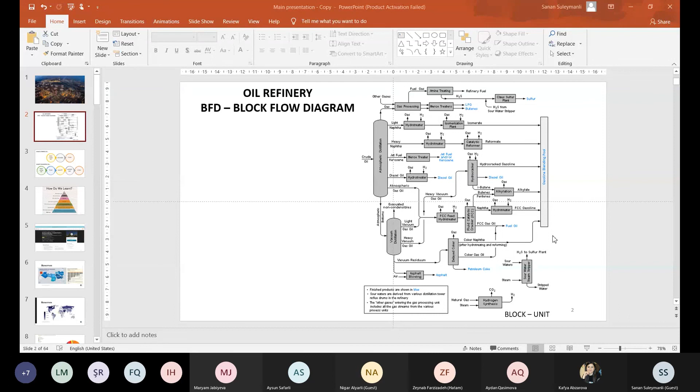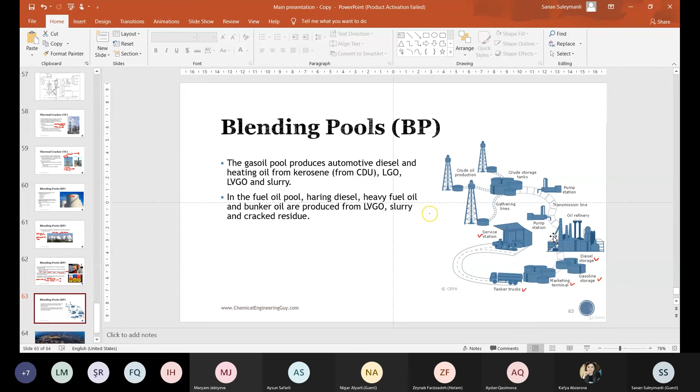Yes, and what were the cylinders on the last picture? You mean this one? Here the cylinders are storage tanks. Oh, these are also storage tanks here. All the cylinders are storage tanks.

So you can ask why the roof is lower, because the storage tanks can have a floating roof. That's why when it is empty, the roof goes down, and that's why you can see the shell around it. But if the storage tank is full, the roof will go up. As you can see here, the storage tank at the center is half filled, that's why the roof is lower. But if you look at the other one, at the edge, this one is full, that's why the roof is at the top.

It is because, for instance, the naphtha can evaporate, and if it evaporates, there is pressure because of the evaporative gases. So to prevent this, there is a floating roof. Floating roofs can also be of two types, internal and external. If it is internal, you don't see it, but these are the external ones, that's why we see them—to prevent the light hydrocarbons in the naphtha from evaporating.